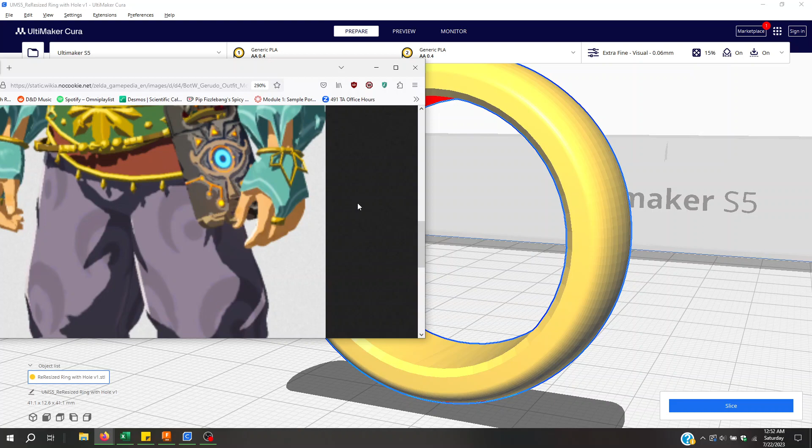The tricky part is, how do we put the pit in the ring? This ring here is sized for my hand, or it's sized to be the minimum amount it can, because if you make this ring any smaller, my snaps were 10 millimeter diameter. So if I were to make this any smaller, I would run out of space. I would not be able to fit that 10 millimeter diameter snap in there.

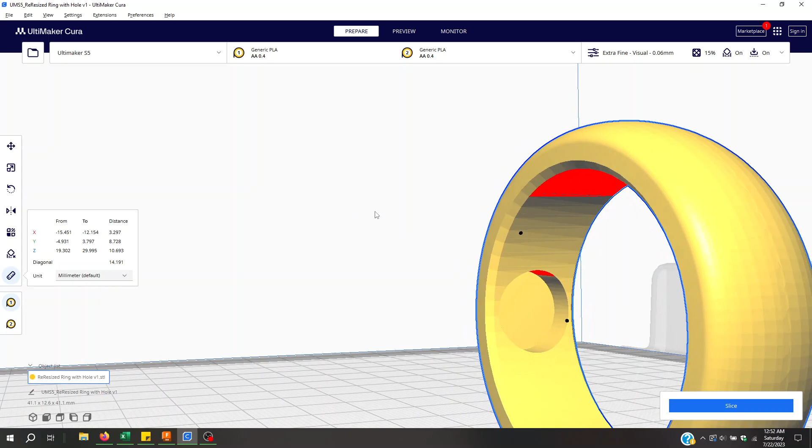So if you want to make this ring a different size, one thing you have to look out for is that if I want to scale this ring up, say make it 150% of its size, well, that also makes this hole bigger. So now this hole won't fit the same snap as it did before.

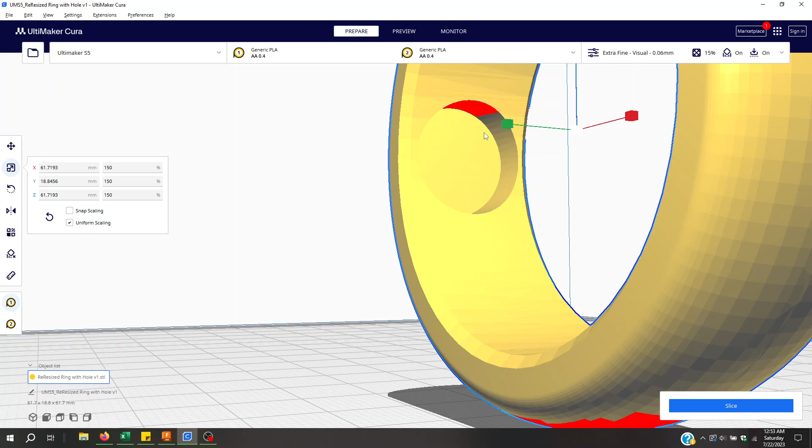Which is really annoying. So what we need to do is find a way to adjust the size of the ring while keeping the size of the hole constant, which is very difficult and beyond my skill set. I don't even know if it's possible. So instead, I'm just going to show you how to make it from scratch so that you can make any size ring with any size hole or pit.

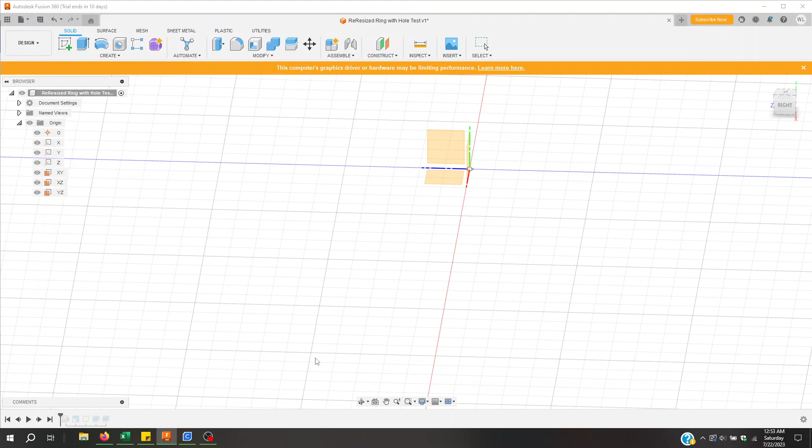So the software I use for this is called Fusion 360. It's pretty neato. What you want to do is go ahead and open an STL file that contains this nice unedited ring. I'm going to go ahead and close this since I don't need it anymore.

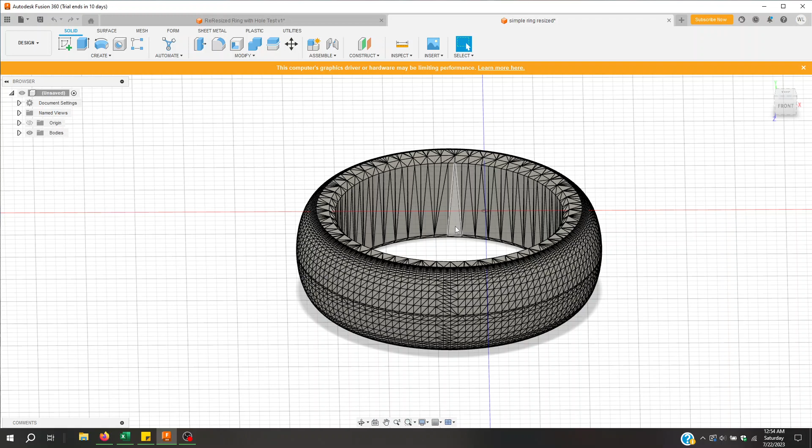And so, now that we've got it, what you want to do is to go ahead and go over here to Bodies, click on it, go up here to Modify Scale, pick the scale amount you want to change it by.

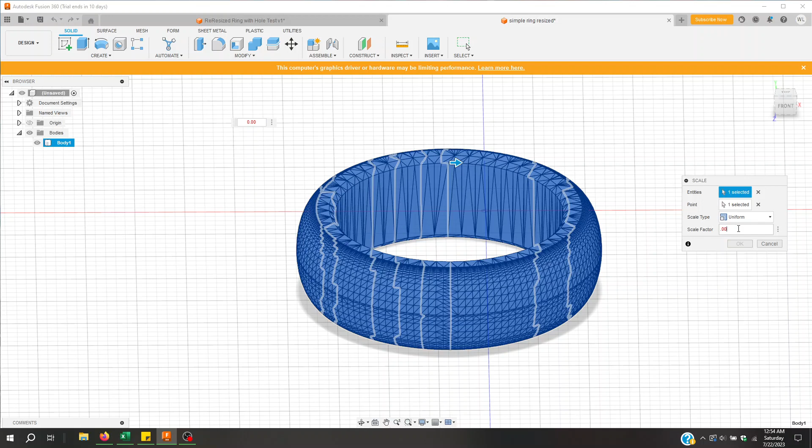Let's say I wanted to make this ring for someone with smaller fingers than myself. I want to make it... actually, you know what, I'm going to make it for someone with bigger fingers than myself. I'm awfully indecisive. Okay, there we go, 1.5. Boom. There you go. It'll chug for a moment, and now we have a bigger ring.

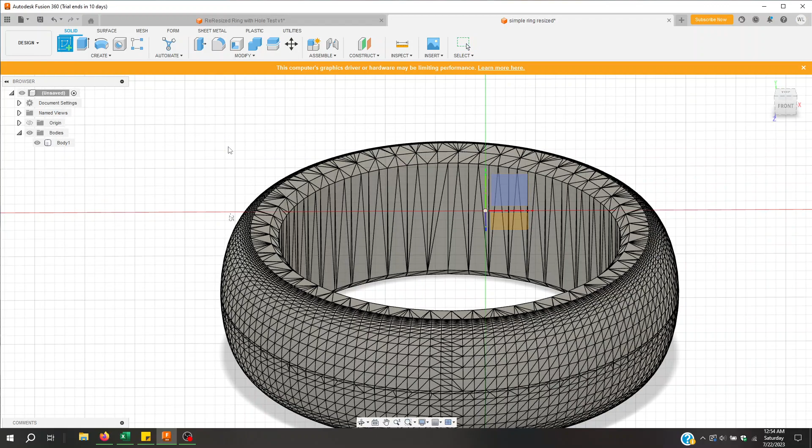So now, how do we put the same hole in this guy? We want to go up to Create Sketch, pick a plane. You want one that is parallel with the vertical surface of the ring, so either of these two would work nicely. I'm going to pick this one.

Go ahead up here to Center Diameter Circle. Click it once, click anywhere, it doesn't matter. If you just click and drag a little bit, you can specify it here, and then you can actually type on the keyboard, which is a lot easier. So I'm going to do that.

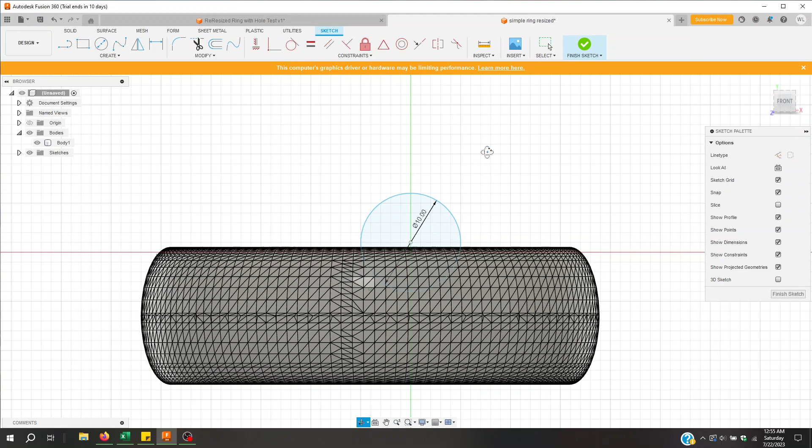Let's say I want this ring, since just like before, it's a 10 millimeter snap. Your snaps might be different, but I'm going to make it for a 10 millimeter snap. And then now we have this guy here.

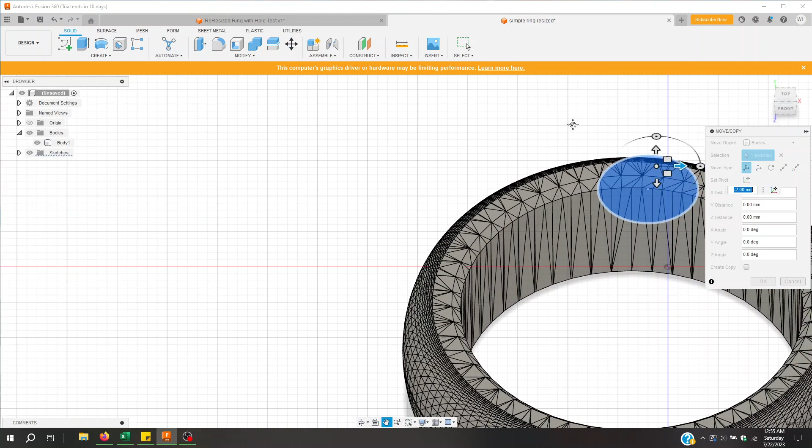We're going to press M to move it, grab this arrow, and drag it over. Keep in mind, I don't know what I'm doing with 3D modeling. I am a complete novice, and I am not a professional, so I'm not going to be making sure this is super accurate.

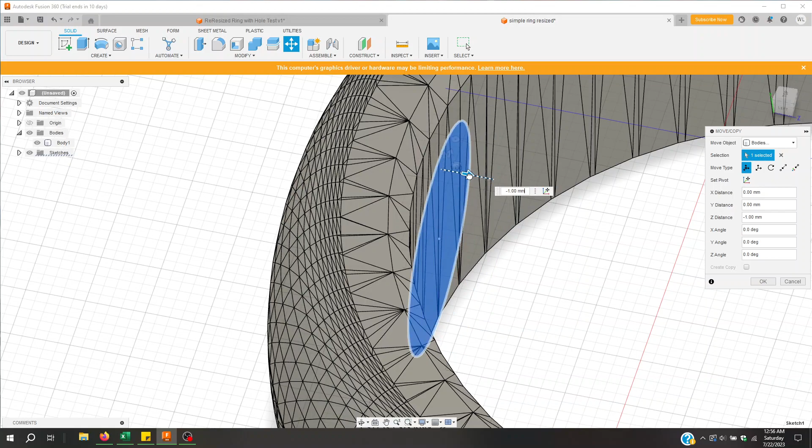I'm just going to kind of be eyeballing it and probably using some very stupid methods. But you know what? This thing is only like a few millimeters wide, and it's on the inside. No one's going to see, no one's going to know, whatever. So I'm going to move it so that the top part of this two-dimensional circle is just barely kissing the side of the ring. It's not exactly touching, but it's pretty close. Whatever, who cares? I am a perfectionist, but we'll suppress that.

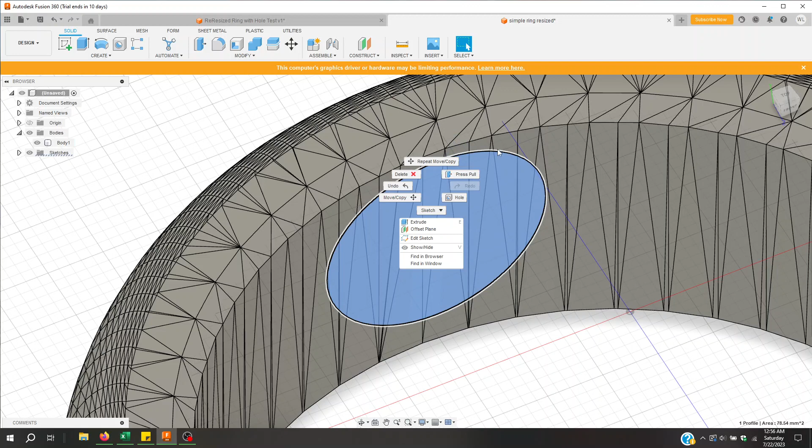So we'll go ahead and hit enter. And then we want to right click on it, hit extrude. Make sure you want this blue extrude — sometimes if you click on the border, there'll be an option for a blue extrude and an orange extrude. The orange one won't give you the options that you need, so you want the blue one.

So we type profile, start with one side, that looks good. You can see by this arrow that this extrude is going to give it depth, but in the wrong direction. We want it to go into the ring. We can do that easy enough.

Let's say I want to make this ring. From looking up my specifications online, I know my snaps are 3 millimeters in thickness, in depth. So I'm going to give it 3 millimeters for the snaps, and you'll see it puts a preview of how it's going to cut that out.

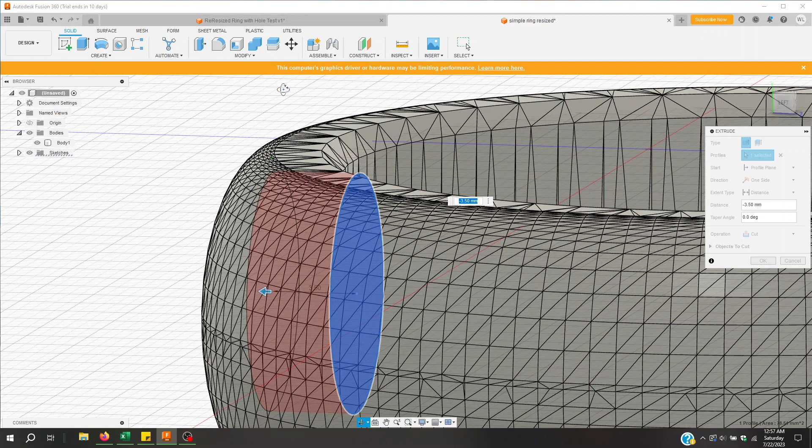And then let's say we want 0.5 millimeter to give us room for glue. It'll get a little bit bigger. At this point you can drag around and see how it's going to stack up against the outside of your ring. You want to make sure it's not breaking through the surface like this.

Oh, I should probably specify: if you don't know how to move around in Fusion 360, you can use the middle mouse to pan, and Shift plus middle mouse to rotate your view like that. Anyways, back to this.

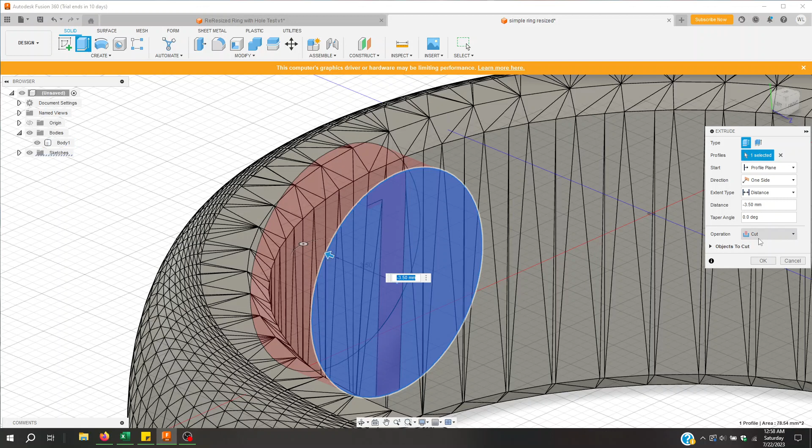So we'll make sure we hit cut here. There's several different options, we want cut. And if we hit OK, it will... what the heck? Okay, I don't know why I did that. We will try again, Control Z, back her on up.

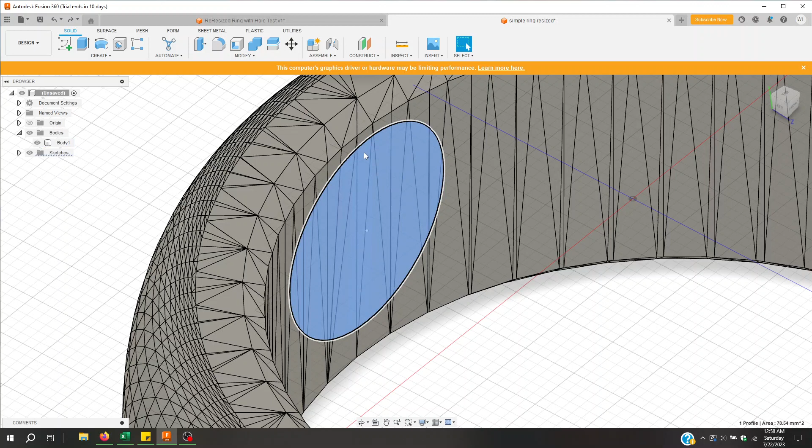Oh, I think I ran into this issue before. It was because this was actually touching the ring body. I don't know why that would be an issue, but apparently it is. So we'll just drag it out just a little bit. There we go, there we go. Okay, let's try this again.

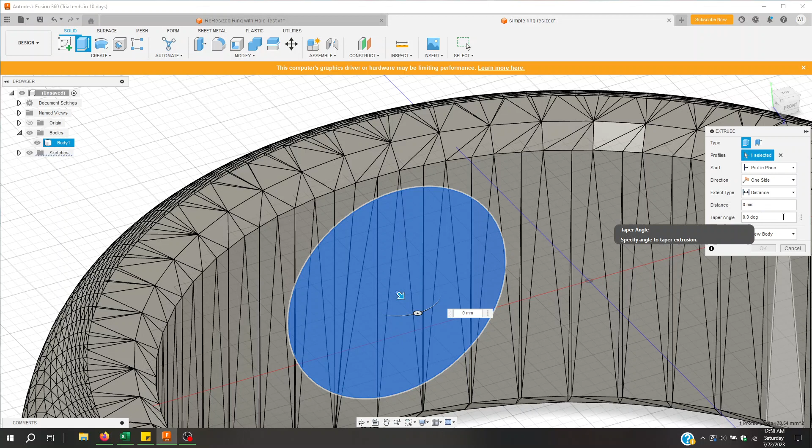So right click, what the heck? Right click, extrude, profile plane distance, negative 3.5 millimeters, cut, okay. There we go. And you can see that it cut almost all of the circle out.

The issue is that it did not cut out these little bits at the side, because our circle is not lined up perfectly. We're trying to line up a flat surface with a curved surface. Try this with something in the real world, you'll find there's no way for the flat surface to touch all of the curved surface at the same time. Understandably. But that's okay, this is super easy to fix.

We just got to click our sketch again. Where's our sketches? We should have it. This is very strange, I do not know where it went. Sketches.

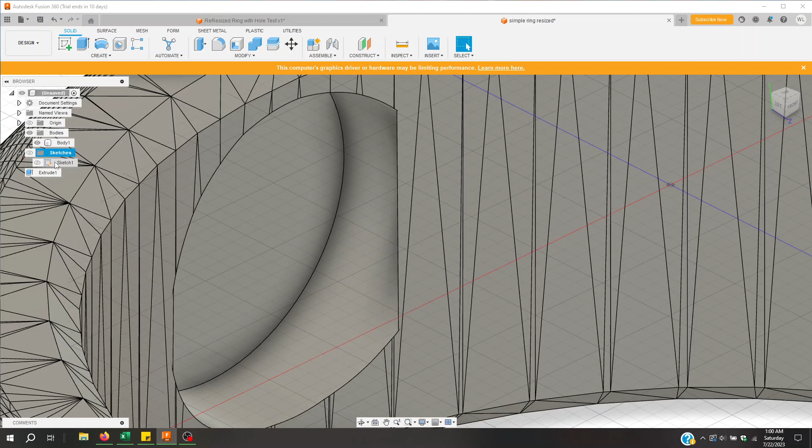Move copy? Sure. Is this moving the cavity? No way. One second, I'm not sure why this is happening like this. Here we go, all right. Little arrow, there it is.

So after we did this operation and hid our sketch, we want to be able to re-see it. Select it again, right click. Why can we not select our sketch, please? I would like to do that very much. Okay, sketch.

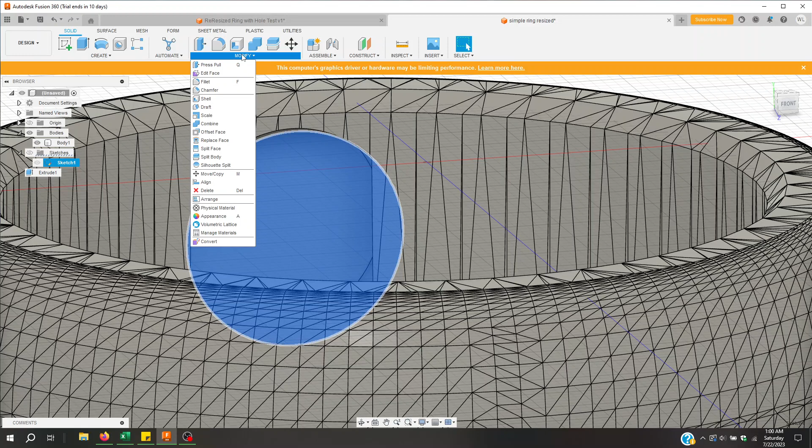Well, then we'll go back to extrude. I'm not sure what extrude is here. Draft, press pull, appearance. Okay, we'll try something else. Okay, so we will move it out away from the rest of the thing a little bit. And that should... sketch.

Where is it? I apologize for the delay. I won't judge you if you want to put this video on 2x speed.

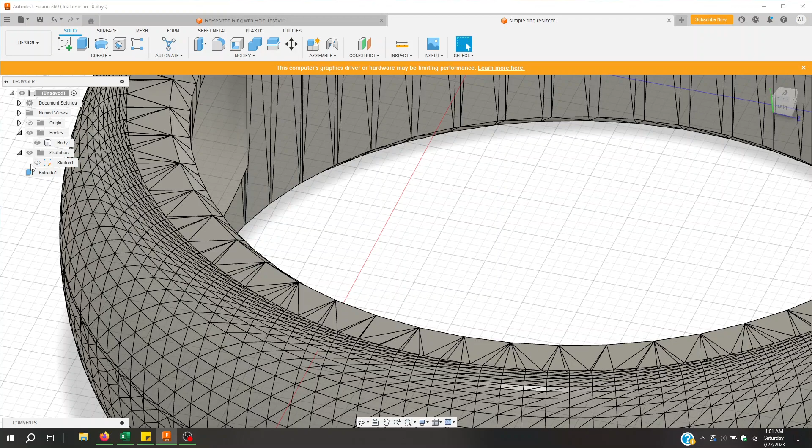Visibility. Oh, here's our issue. Okay, so we were toggling the visibility of this, but that doesn't matter because the visibility of the entire group was overriding that. So we make sure that both this is visible and this is visible. And now we have our sketch back.

I'm going to put it back into its original location where it was. I can't do that, whatever. Okay, well, the process is the same. We just extrude now, and we'll say -3.

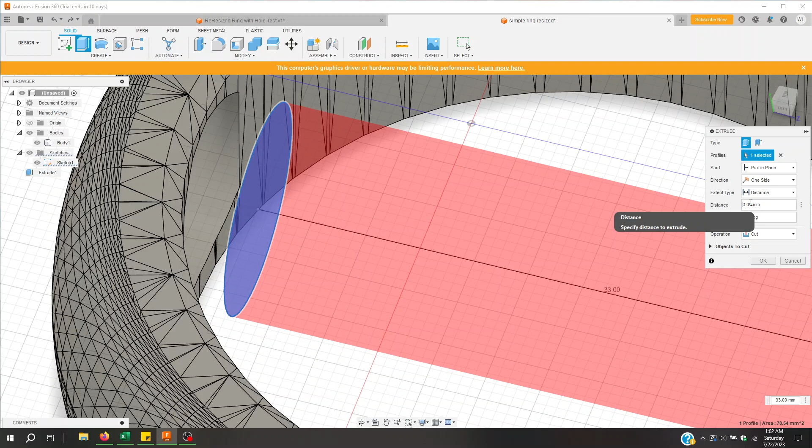And so now that we've moved our sketch back and redone that same cut operation, we will remove those little tiny thin parts that we missed before. If you want, you could, if you had left the sketch where it was, you could have just said cut coming out this way instead, and it would have done the same thing. If you have the sketch coming this way, you'll figure it out.

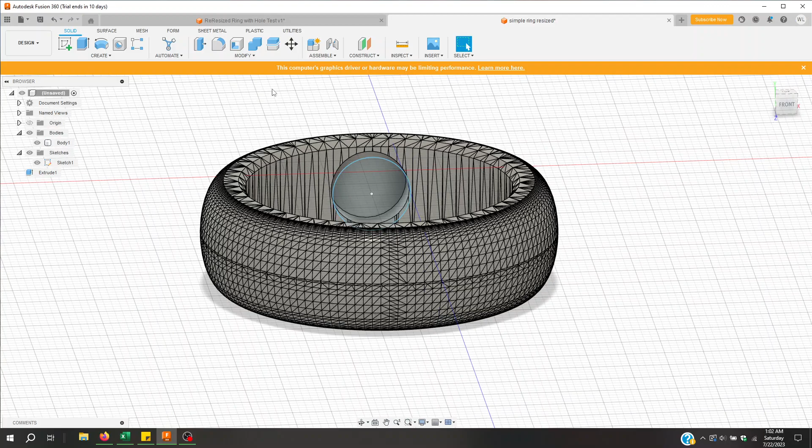And then make sure we hit cut again. I'm gonna have to put this back to negative for my exact use case. And then, okay cool, and then we should be done. Now we have a ring with the size we want, with the size of hole we want, and we are all set.

To save it. Well, to save it, and then once it's saved, we can export it as a step or an STL. Or really, you don't have to save it, but if you don't save it first, you can only export as a step. You won't be able to export as an STL. So, yeah, you can deal with that.

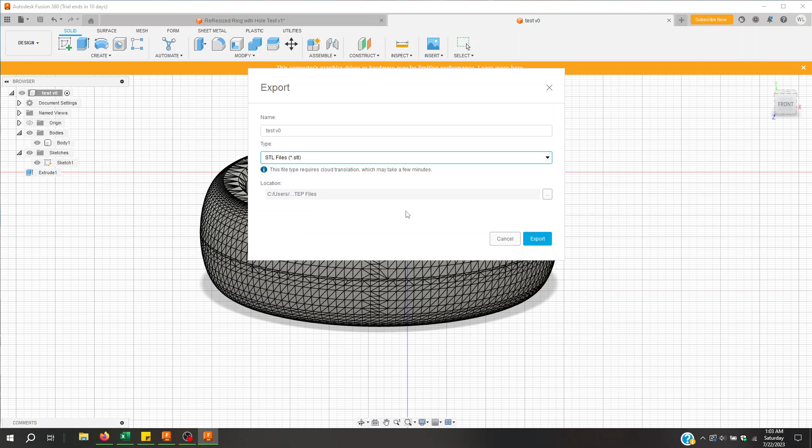Yeah, so once you save and export as an STL, you'll be all set to 3D print. Hope this tutorial serves you well.